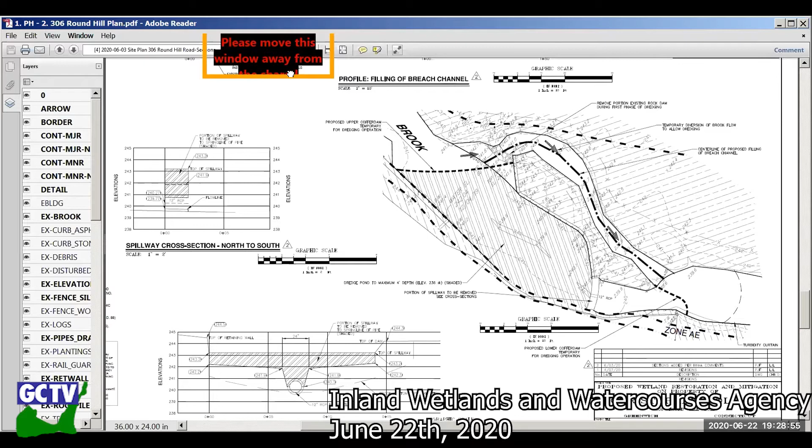As Bob Clausey indicated in his remarks, this project has been significantly changed, and we no longer, by way of lowering the spillway to its pre-failure condition, need a fish ladder at this point, as we're now going to have equal elevations on either side of that pipe. So it's essentially continuous low flow condition for the stream system. We believe the fish are going to be able to migrate.

Be glad to hear what Mr. Gephardt has to say.

The planting plan, I think, has been discussed sufficiently with Bob's summary. And then as to the engineering details, Peter Finkbeiner has made a correction on the analysis or the numbers that he utilized.

And I think what his conclusion was originally, and what it is now, and Peter can speak in greater detail, is that the dam itself is really inconsequential in terms of the flows, since it's the Round Hill Road culvert that really restricts and determines what's going on here.

So what we're proposing to do is essentially reestablish the pre-failure condition, actually even less of an extent of the dam, because by lowering that spillway we're essentially opening the whole stream up. So we think that will be borne out by Mr. Marucci's subsequent evaluation, and I'm not sure where we stand with the agency's outside consulting reviewing the materials. Can you update us on that?

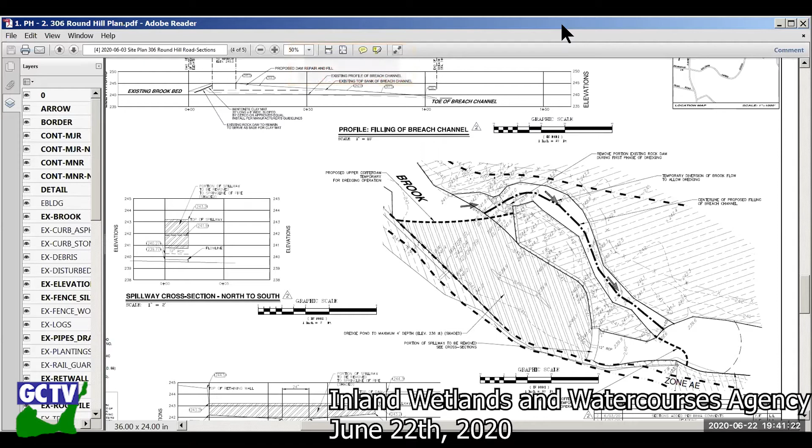This is Larry Liebman. I think that what we need to do is match the stream bottom going upstream like it is matched below stream, and please afford us the opportunity to get that to you prior to the next meeting. Good, sure.

Okay, any other comments? Any questions from the agency? Nope. Do we have any public? I'm sorry, yeah, I do actually have.

If we are thinking about getting an outside consultant, and if that's still on the table, I would suggest that we have a very crisp remit for the person, addressing issues that we feel we cannot address, and looking at flow patterns, etc., that are critical to this, rather than an open-ended one.

Okay, agreed. Is there any public comment or question on this application?

I do not see any hands raised.

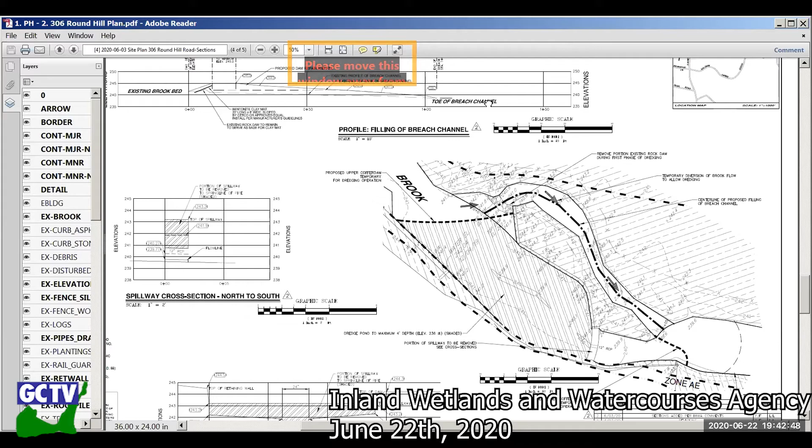Hi, this is Larry Liebman. I think what I'd like to do is keep this focused so that the next time we come before you, we have all of your questions answered. What I have written down is the elevations of the stream bed, the stability of the material used to fill the breach, and whether the planting plan is good, or if we need to make any revisions to that. Obviously, we can tweak that at any given point in time.

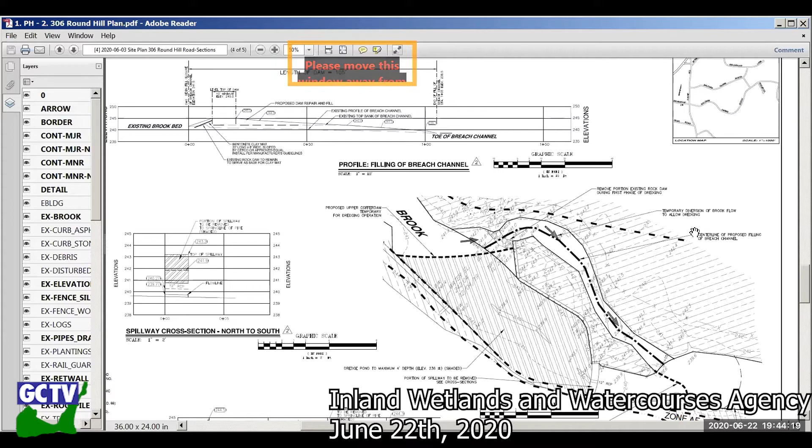I would want to know what we need to provide regarding the outside consultant, if we're going to use one, or if Mr. Marucci, your engineer, feels there's no difference now that he's looking at the numbers. I want to bring out the point that when the town built that bridge, they didn't include that dam as part of any of the pre-condition or post-condition calculations. It was inconsequential to what they were doing, because they were backing up water on the high side of Round Hill Road. So I want to keep it close so we can get something moving, because I don't want to miss the opportunity to fix this situation, take the dam out, and bring it back to what everybody wants it to be.

Fine. Good. Okay, so we're continued. Are there any other comments or questions from anybody?

Jay has a question. What determines the width of the slot in the dam?

Anybody? Larry? I'm talking to Peter Finkbeiner, who's here with me. Are you talking about the current condition or the proposed condition, Jay? The proposed condition.

We believe it would be a little bit larger than what the pipe is. The pipe is a 12-inch diameter, so the notch would be bigger than 12 inches because we're taking that off. But what was the purpose of the 12-inch pipe that you're matching at the bottom of the dam?

That's it, because it's an existing pipe that's there. What does the pipe do? The pipe is a low flow pipe, so that during low flow conditions, water always flowed through that pipe.

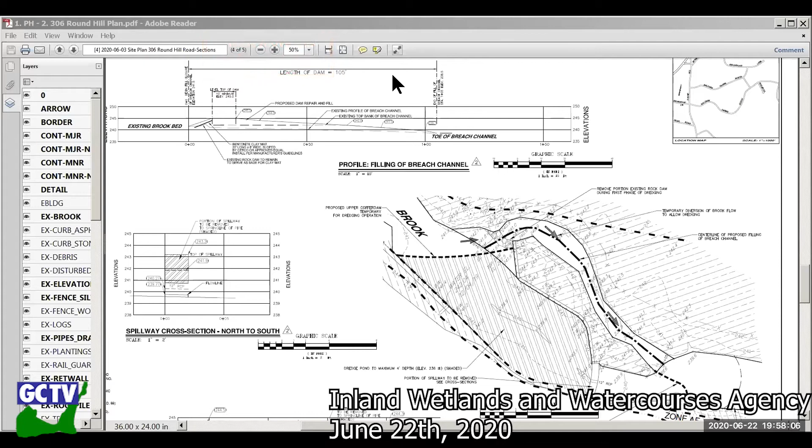Okay, do we need a motion to continue or do we just continue? I think we can continue to the next regularly scheduled meeting in July. Very good. Then we can move on to 2020-13 and 2020-14, 8 Hickory Drive and 0 Hickory Drive. I believe we've been dealing with those together in all the meetings we've had. So let's see, Mr. Causey?

Thank you. Since May 18th, specifically for 8 Hickory Drive, which is the northern lot, the file has been supplemented by the supplemental staff report I prepared on May 18th, DPW review comments from Scott Marucci dated May 12th, a revised sediment and erosion control plan prepared by Sound View Engineers and Land Surveyors dated June 1st, and a revised wetland and buffer habitat enhancement planting plan prepared by William Kenny Associates dated June 15th.

The vice chair is correct, we've been handling both of these together up till now, but if you don't mind, I think I'm just going to talk about 8 first and then 0. That's fine. Okay, so regarding 8, which is the northerly lot...

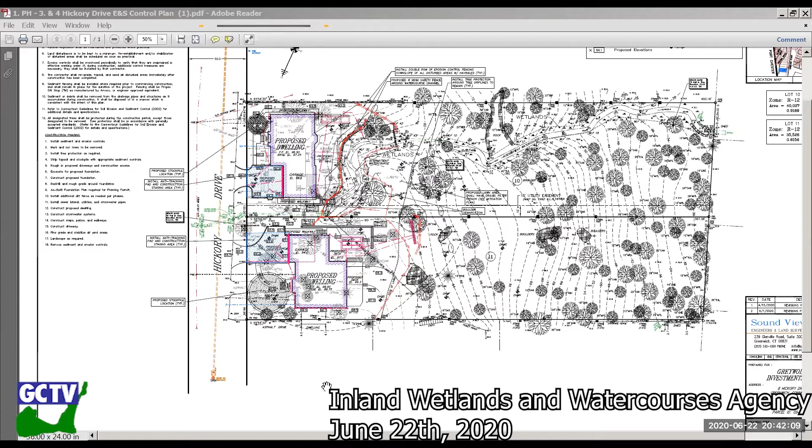So do you want to put that under the arborist, or shall we have another special condition for this one? I think that would constitute a different monitor than the arborist. Okay, so tell us where it should go.

I would have a special condition that a monitor would be engaged by this agency, paid for by the applicant, to inspect the site - this is just Zero Hickory - weekly or prior to a storm event, whichever is more frequent, and then discussion with agency staff to lengthen that time as the project progresses.

Sounds good to me. Yep. Can I have a motion to approve with those additional special conditions, please? So moved. I think that was Bill. Bill, yep.

Second, Joe. Joe second. Okay, run through my squares. Klaus Yonder, yes. Jay Shondorf, yes. Bill Galvin, yes. Joe Rogers, yes. Norma Curlin, yes. Stefan Skofilis, yes. And Elliot Benton, yes.

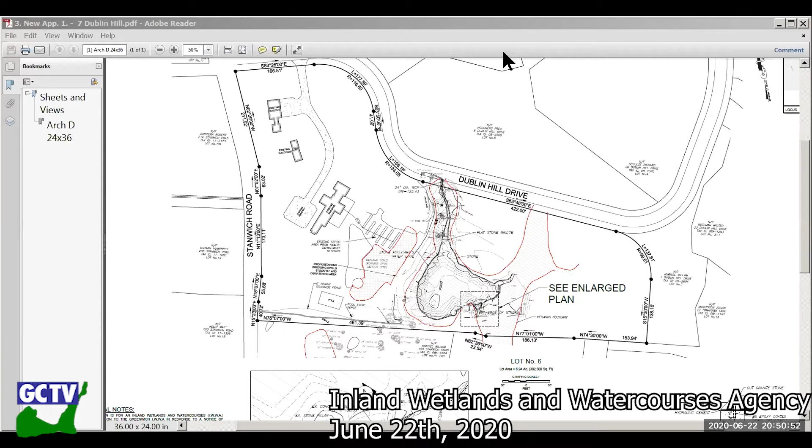Very good. Can I have a motion on this one, please? Motion to approve. I'll second, Joe Rogers. Motion to approve was by Stefan Skouflis. Pat, you are muted. That worked, here we go. Okay, I have the motion by Stefan and second by Joe, with no alterations to the conditions of the order that were presented by Doreen.

Correct. Okay, so running through: Klaus Yonder, approve. Jay Shundorf, approved. Bill Galvin, approved. Joe Rogers, approved. Norma Curlin, yes. Stefan Skouflis, yes. Elliot Benton, yes. Okay, terrific. Thank you, everybody.

And moving on to 2020-055, 94 Pecksland. Let's see, who's this one? Doreen again.

Doreen, you're muted. Doreen. I will start again, I was muted, sorry. All right, so this is a corrective application in response to a stop work order. It was issued due to the removal of old foundation walls and site grading that was about 8,300 square feet adjacent to a pond and wetland on the south side of the property.

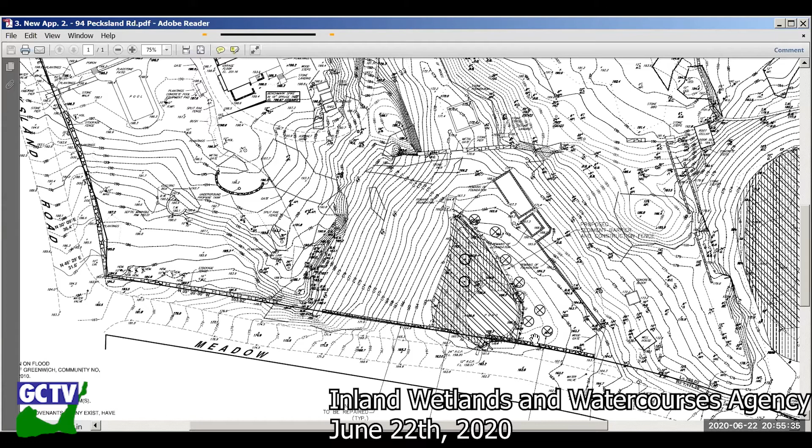Okay, running down our list. Elliot Benton, approved. Stephen Skofilis. Stefan, is that a yes? You're muted. He's muted, but Stefan is shaking his head yes. Yes, it's Stefan approved. Norma Curlin, yes. Joe Rogers, yes. Bill Galvin, yes. Jay Shorndorf, yes. Klaus Yonder, yes. Okay.

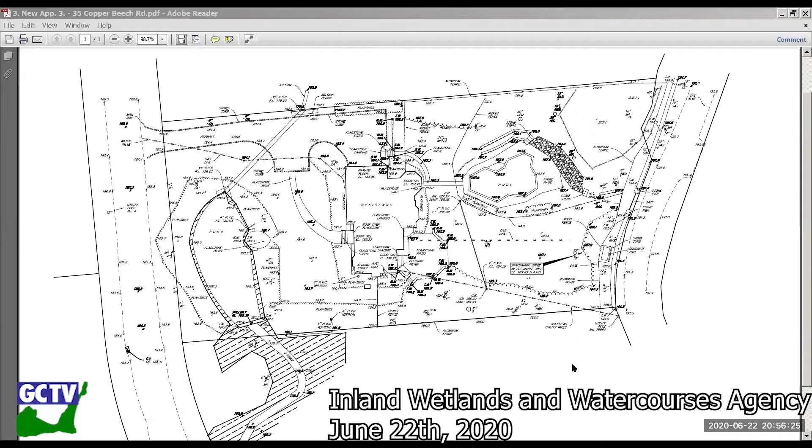Very good. Last but not least amongst the applications, 35 Copper Beech Road, 2020-057, Murphy Brothers Landscaping for Ryan and Alison Willingham for replacing septic system and remove rebuilt front porch.

Mr. Clausy. Hi, Bob Clossy. This application, these folks just moved in recently, and apparently before they moved in or as part of their discovery, they had the septic system checked, and 3 different installers felt that the existing system was impaired. This application was submitted as an emergency permit for a failing system. And so it's sort of been in limbo for a month because I've been ready to issue an emergency approval to fix it. But the health department has tested it and has not failed it.

So now it's before you for review. The proposed leaching gallery is shown 40 feet from the wetland, which is further away than the closest of the existing trenches. And I asked the installer, did you test the soil anywhere else, like in the backyard to the south of the pool? And Mr. Murphy said that they tested everywhere, and the soils where they have the system designed are the best on the property.

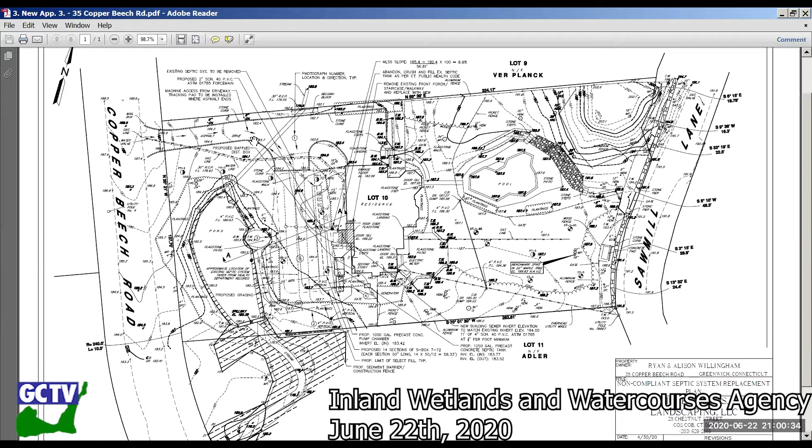Okay, Klaus Yonder. Move. Elliot Benton, yes. Joe Rogers, yes. Stefan Schofield, yes. Norma Curlin, yes, thank you. Jay Shondorf, yes. Bill Galvin, yes. Did I get everybody? Good, 7-0.

Very good. Violations. Cease and correct order 2018-017, 225 Stanwich.